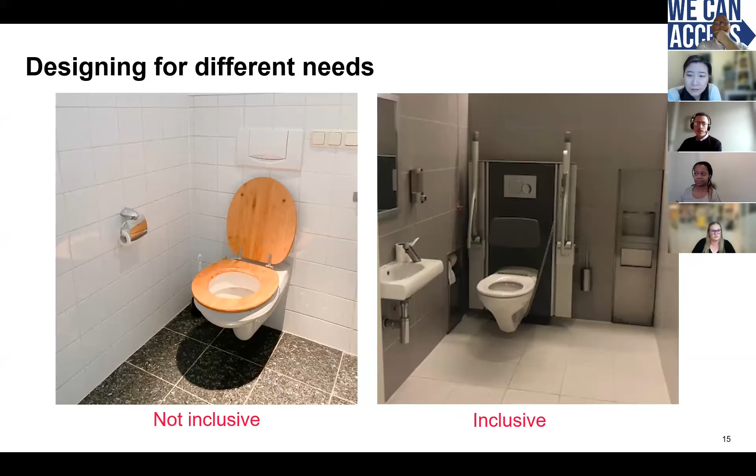No, yep, that's absolutely correct as well. Pushing the flush button, some people might not have the dexterity or strength to do that, or might find that fiddly or difficult to access depending on the control they have of their limbs. You do have flushes that are sensor activated, but they can be quite uncomfortable or unsettling for people, say, who have cognitive difficulties, just because they might shock the person. So the waving operation for a flush would be very inclusive because you're in control of it, and it doesn't obviously require much strength or excessive complexity to use. Thank you. No worries. Yep. Next slide, please.

So why should we do inclusive design? Well, ultimately, inclusive design means we work together with different types of people, and we can identify the different barriers that exclude people from using and enjoying buildings and spaces. When we do this, we can also understand what people need and how we can design for different needs, so we can create places that everyone can use and enjoy.

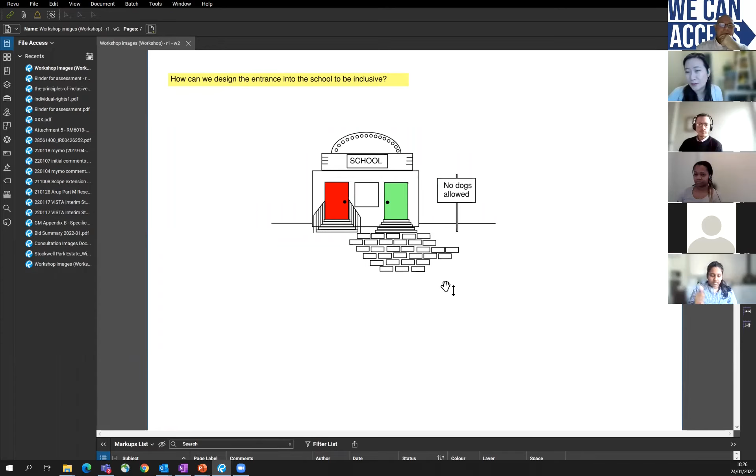Wonderful, so I think this is the point that I'm going to attempt to swap. Yes, here we are. Can everyone see a new diagram or drawing of a school on the screen now? Yes. Okay, wonderful.

As Zach said, what we want to do is get your thoughts as to how we can design this to be more inclusive. On the screen, we have a rectangular shaped school. At the top of the building, there's a sign that says school. There are two entrances. One entrance is red, with a flight of stairs leading up to it, and handrails on both sides of that stair. On the opposite side, there's a green door with some steps leading up as well. There's cobbled paving at the front of those steps, but no handrails provided. Off to the side of the school, there's also a sign that says no dogs allowed.

So I just wanted to hear from all of you on the call. What sort of things do you think we can do to this school that can make it more inclusive? You can unmute yourself and shout out any thoughts, if you feel comfortable doing so. And if not, you can drop some messages in the chat box, and Jasmine and Zach will have a look at those and read them out for you. So completely up to you.

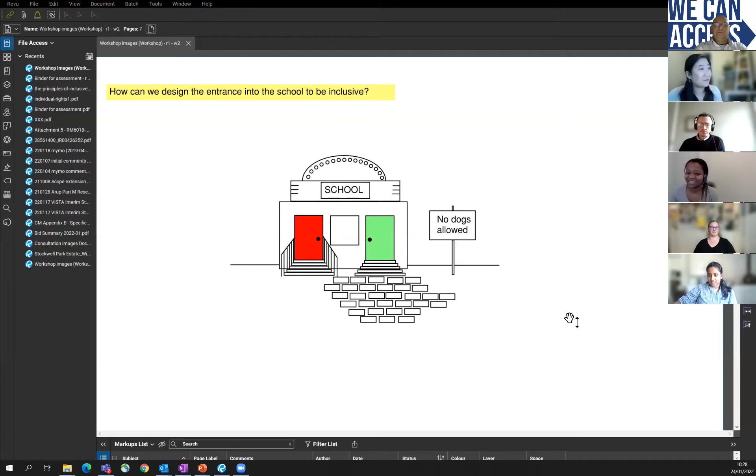I've got one, if you don't mind. Yeah, of course. No dogs allowed - people maybe who have vision impairments and have assistant dogs. Yeah, that could definitely be one.

Wonderful, so shall we get rid of the sign then? Or even better, you could change it to dogs allowed on premises. I think that's a very good point, because we might have guide dogs, we might have emotional support animals, all kinds of circumstances where that sign could present a huge barrier to people entering the space.

I think there's a hand up from, is it Mia? Yes, hello, hi there, sorry I joined a little late. No worries.

If a student is in a wheelchair, then I don't think stairs are the best way for that child. Even with rails, that can be a little difficult. So maybe we could get rid of the stairs completely and have a slope so any student could walk in or use a wheelchair to climb up into the school. Thank you, that's a great idea.

I've gotten rid of the steps now, so let's quickly put in a slope instead. And let's duplicate that so that we've got that on the other side as well. Okay, wonderful, thank you very much for that.

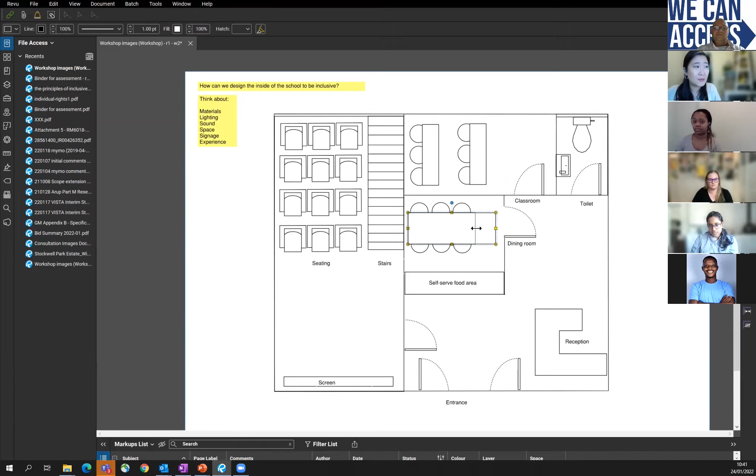Likewise for this one, if I were to change this to a 6-person table for the dining room instead, it means we've got a little bit more space for someone to actually get past the table when they enter the dining room, and to actually use the food area.

Wonderful. Any other thoughts from people?

When you're reducing the amount of people in the food serving area, does that mean there'd be flexibility in terms of timetables for the children and year groups to come along? So rather than having one long lunch, because they're improving accessibility within the food serving area, they'll manage more of the flow, get fewer people in at once, and calculate the number of covers within that particular time period. Does that make sense or not?

Absolutely. One of the really important things of inclusive design is thinking not just about what we're physically providing within the building, but how people are actually using and operating within that space. Because we've got reduced capacity within the seating, we can look at how we get people out of their classrooms into the food area with a flexible timetable. We could also look at other spaces available within the school, like an outdoor garden in summertime, to widen that space and make sure people still have the opportunity to speak with their friends and peers.

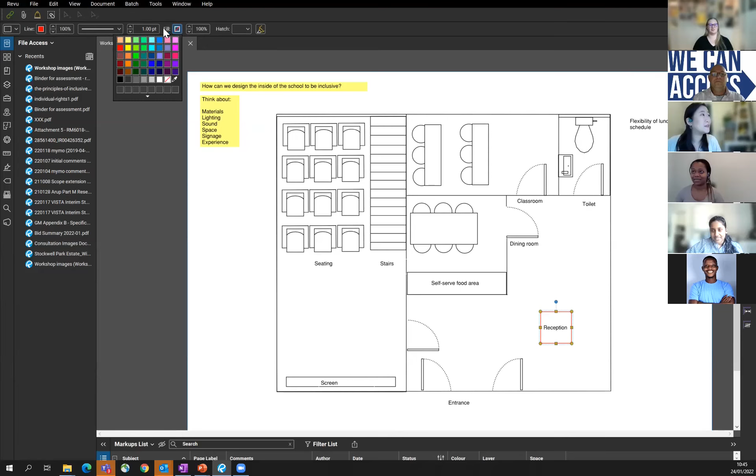To do some remodeling with the bathroom, it might be beneficial instead of having the toilet facing southwards, to put it on the eastern wall, so people who may have a wheelchair have more space to maneuver in that area.

And with the door as well, maybe have it opening outwards, or even a sensor door that can lock from the inside with those wave panels David was talking about before - that's also more hygienic in terms of use, keeping germs at bay, especially with coronavirus and touching surfaces.

And we could think about potentially using a sink with the tap in the center of the basin, so it's easier to use, and maybe even one with a sensor as well, again for hygiene.

Wonderful, that's a great idea. So I'll draw this up properly afterwards, but what we're saying is the toilet on the east wall, and the sink - you could maybe even move the sink further towards the southern wall to give more space in between both, and potentially move the tap head into the center of the basin. Makes sense, wonderful, I think that's a great idea.

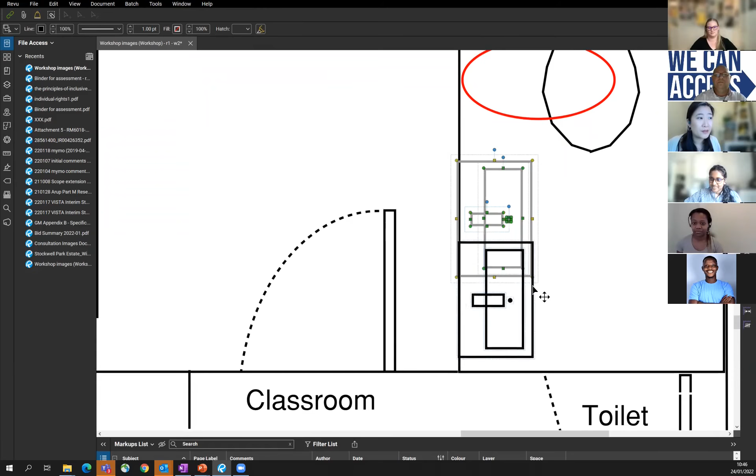Let's move this further south then. Wonderful. Perfect, any other thoughts from people?

Because I don't know how to put my hand up - what about the design of the sinks and also the toilet roll holders and the flushing mechanism? Can you talk us through that, please?

Yeah, of course. One of the things we'd want for a toilet suitable for a wide range of people to use is that all of the facilities within the toilet are equally easy to use. So for the toilet roll holder, that would need to be easy for someone to use when they're seated on the toilet - it needs to be within reach, and it needs to be safe so that when people are reaching for the toilet roll, they're not overreaching, so there's no risk of someone falling.

Sorry, I've forgotten the other item you mentioned, David. It's the flush, and also washing your hands. Taps come in all sorts of different shapes and sizes, and schools have to think about the stuff being broken realistically. There's a big difference between someone buying a domestic tap for home use, versus an industrial setting like a school, where you've got potentially hundreds if not thousands of kids using this every single week. How does that work on an industrial basis for schools?

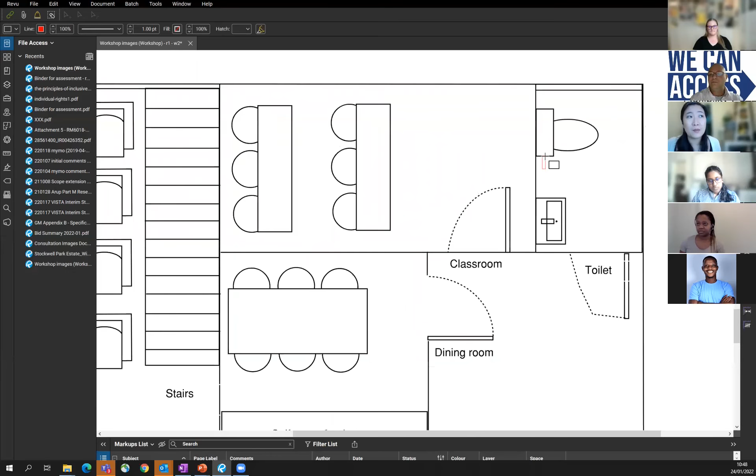In terms of the flush, what we'd typically say is that if we put it on the side where there's most space, it means that regardless of someone's body shape or size, or whether they're using additional equipment - if they're a wheelchair user or have walking aids - they've got plenty of space once they finish using the toilet to actually reach the flush. In this particular layout, it wouldn't make sense to put it in that corner, because it would mean someone having to get into that tiny space between the toilet and the wall. So for this example, we'll put it on this side instead.

As you mentioned, I think it was Lexi who suggested moving the tap so it's more central. That's a really great idea, because it means people are able to swivel around and use the sink, have good reach of the tap, and use it while still seated. That reduces the risk of someone falling over, and gives people the opportunity to make sure their hands are clean before they transfer back into a wheelchair, as an example.

Yeah, it's much more inclusive that way. Touching on the point you made, David, about a space like a school where lots of people are using it day-to-day, we need to make sure the products we're using are very durable, hard wearing, and easy to clean. With the pandemic and COVID, it's especially important that the surfaces people are touching day-to-day are hygienic and safe to use.

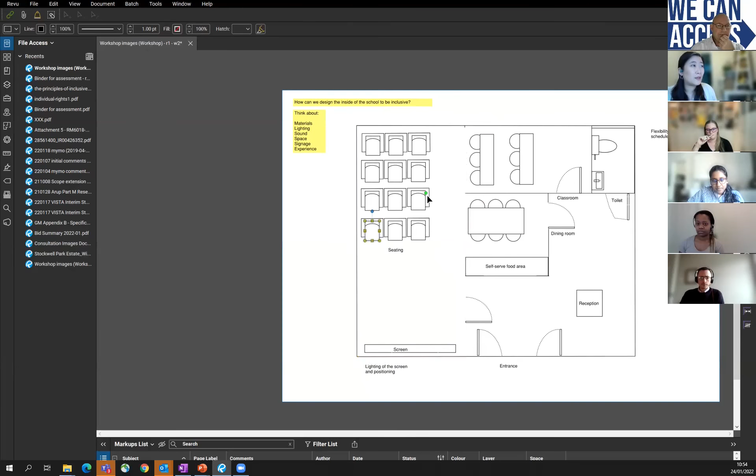Sounds brilliant. So if I get rid of that, there's too many things - let me get rid of that. So if I get rid of those, and we split that up, then potentially if we're duplicating those screens, going back to David's point as well, we can have one at a slightly different angle and height to the other, so people are able to choose which one they prefer and which is more comfortable for them, and sit on the side of the room that accommodates that. So, too many things again.

Yes, I'll... trying to do this live is... this is a lovely piece of software. It's brilliant what you're doing, it really is - if I can select the right bits. Don't worry about it. I'll move those overlays. Everybody knows, no, it's absolutely fine. I'm sure people know, is that right?

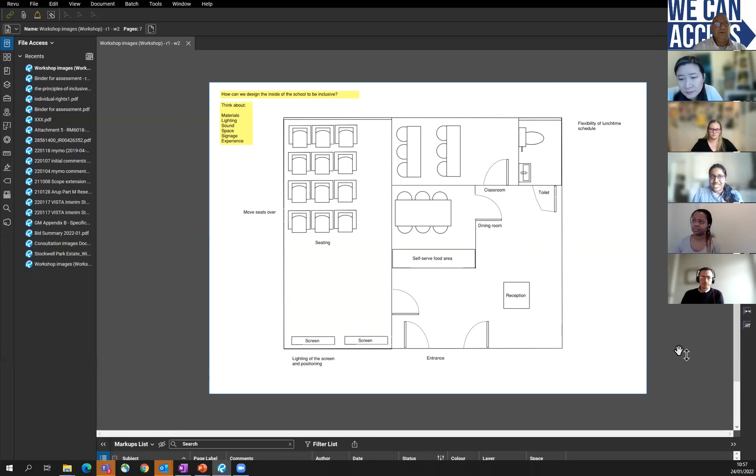Which country are you in? I am from India. And the schools, how old are the buildings? I come from Kerala, and we have the highest literacy rate, so everybody is in schools. School buildings pop up very often because we have a good population, and parents really want to enroll their kids. So school buildings go up very easily, but the inclusivity factor is not so much. If you're a special needs child, there's a special school, but enrolling them in a normal school with kids who aren't special needs isn't that common. Do you go to a private school or a state school? It's the same everywhere. I am a uni student, a student social worker, so yeah, it's the same.